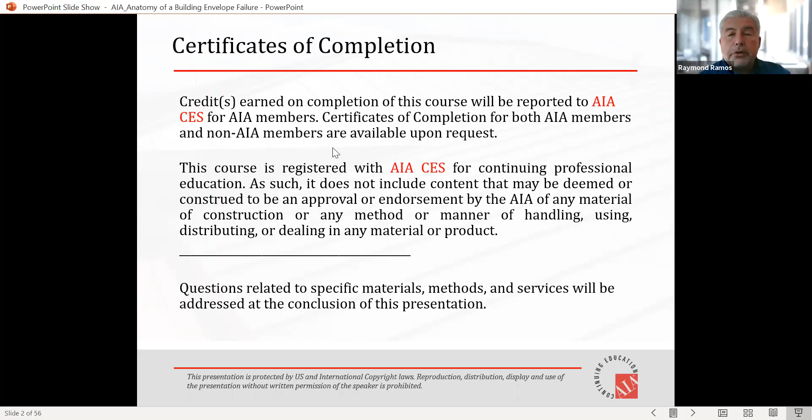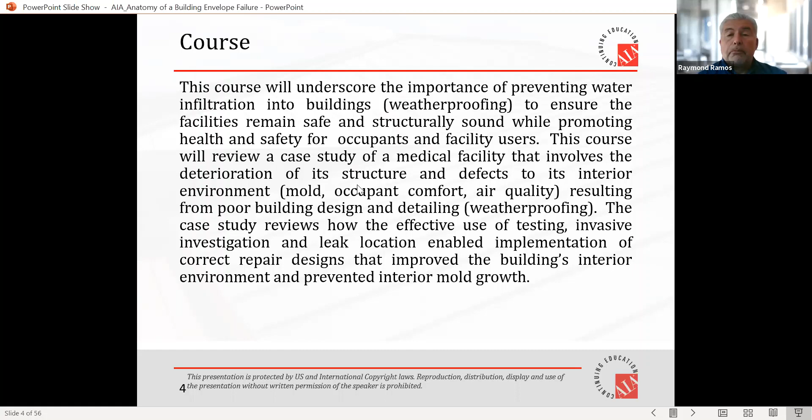What we will cover in this presentation is issues that you can encounter with a building envelope failure. We call it building envelope now because primarily, years ago when I got in the business in '84, most of our attention was on the roofs. We would look at the walls and structures, but for the most part everybody was paying attention to where the water is coming in through the roof system. With changes in how we build facades, more and more we're finding the roof isn't always the problem - maybe it's something else with the building envelope components causing water infiltration. And with the emphasis on air barriers, it has definitely had an impact on condensation issues that can occur within a facility over long periods of time.

So we'll take a look at what can entail in a building envelope failure. We're using in this presentation a project that we actually did over in Eastern North Carolina a number of years ago - the methodologies used to determine what the problems were, and the solutions that were developed to solve these particular problems.

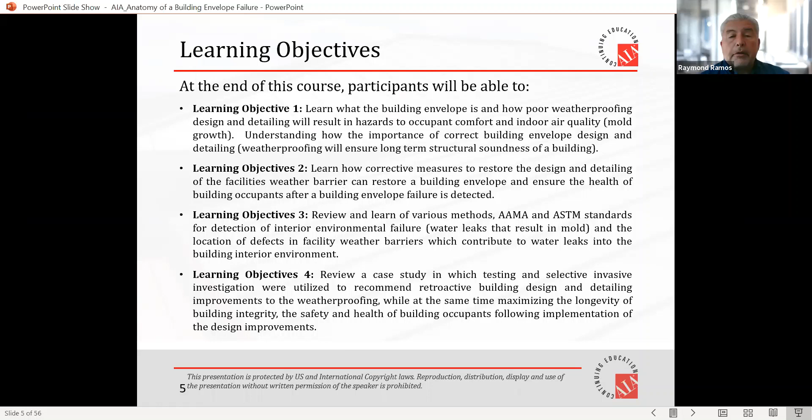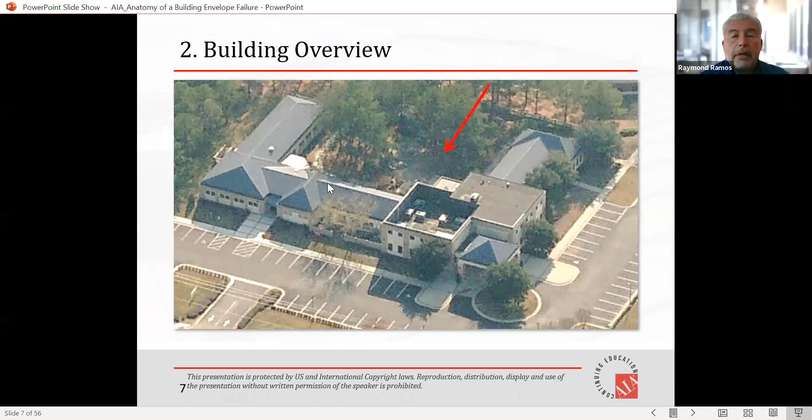So what we're going to look at is a neurology clinic in Greenville, North Carolina. When you look down on it, it looks like a pretty standard building. You can see we have a flat roof area. We'll zoom in closer and you'll see that we have metal roofs on most of the building, and when we look closer, we have a brick veneer facade.

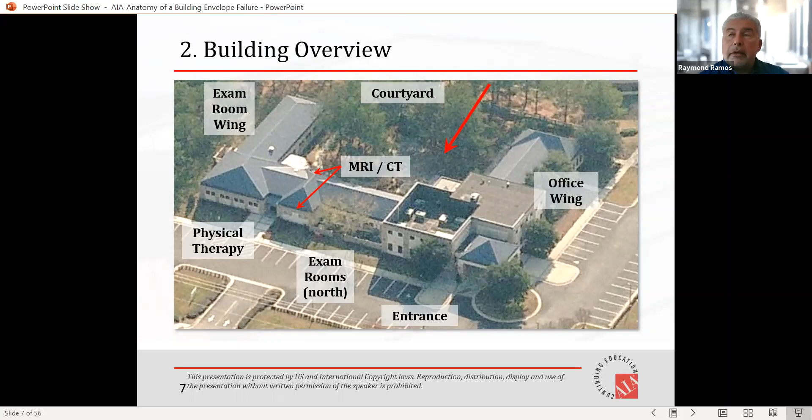This gives you a layout of how the building is presently being used, where we have the entrance and office wings, exam rooms, an MRI area near the center of one of the wings, and then physical therapy - not much different from any time any of us have been in to see a doctor or a specialist.

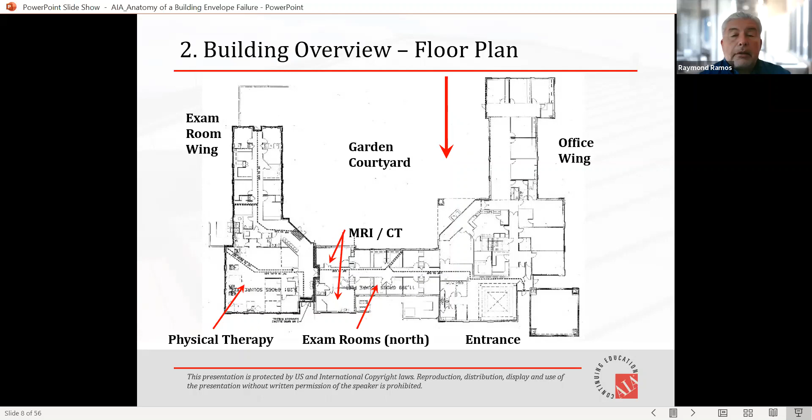Looking down on the floor plan, you see it's really just broken down mostly into an office configuration. Even the MRI and CT areas are office layouts, except now they have specialty equipment within those. Physical therapy will have basically weights and equipment to deal with these particular patients.

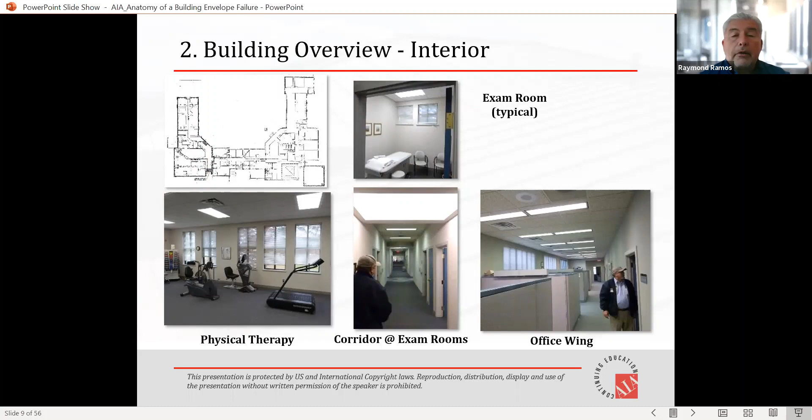When you look inside, you can see again it's a typical medical office facility - sheetrock walls, lighting in the ceilings, drop ceilings, pretty standard carpeting in the flooring areas, and linoleum for the most part. Now, the owner is basically complaining about water coming into the building - that's really what they're dealing with. As a result, they've got peeling paper and mold as some of the issues.

They're really not certain what is the cause of it. They suspect the roof as being the problem with this particular infiltration issue. So we're going to go in and look at this and see what the problem is. Is it the roof? Is it something else? Is it windows? Because a lot of the leaks are around windows.

If you need to do testing or more invasive examinations, this could entail water testing, infrared work, nuclear work, whichever the case may be on the roof. It may require removal of some sheetrock inside in order to look at some of the leaks that are occurring, particularly as you go into water testing. So those are some of the things you get into with this.

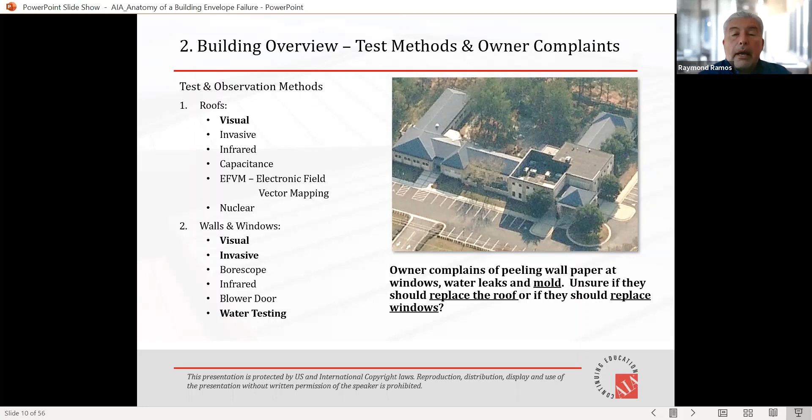So, like I said, excuse me, I'm at the house and I didn't bother to deal with that particular phone.

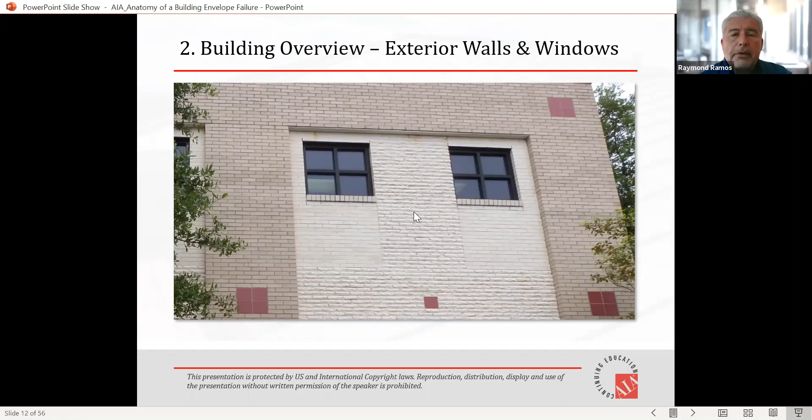As you can see from ground level, we're dealing with a brick veneer on the vertical surfaces. We have some inset brick veneer also on the two-story and a few other locations. Typically we're dealing with a lintel system to hold up the brick above these inset areas, and then the window systems in there.

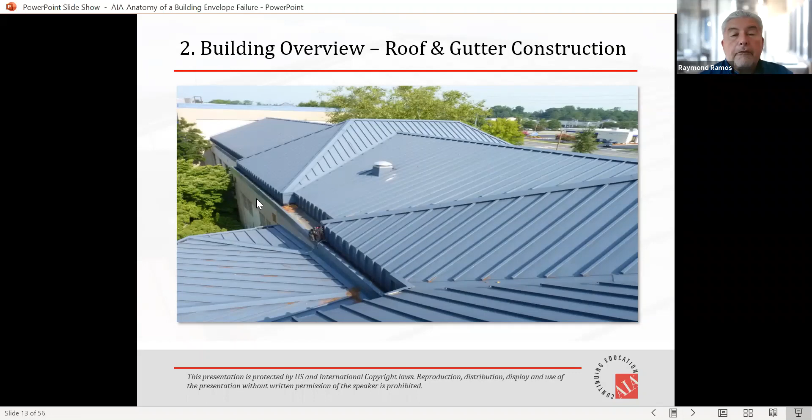The roof system is standing seam, typical metal systems. What's a little unique about this is we have a gutter system. Not trying to pick on architects, but architects tend to not like gutters. We have to control the flow of water, but they also wanted it to blend in with the facility. So these are actually gutter systems that sit on top of the exterior walls, which is how they blended the gutter system in so it doesn't really jut out from the facade.

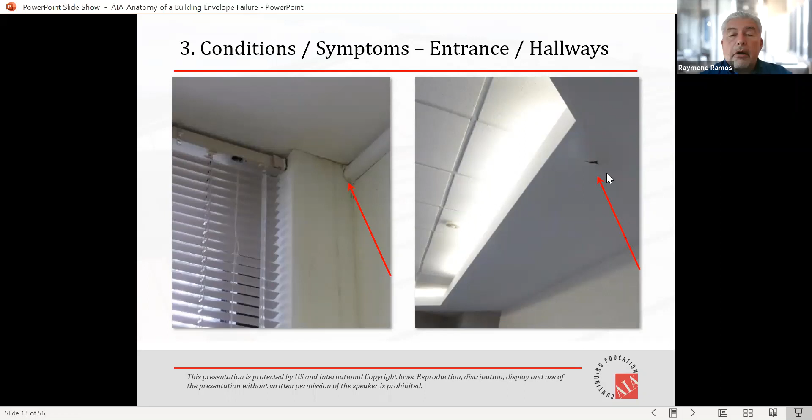Leaks that are occurring, the vast majority are at the perimeters, at windows. There are some in the hallways offset from the windows, but that's not typical. We've got the physical therapy area, and they've got window leaks also throughout this area.

What's really interesting about these window leaks and the problems they've been having, because they've been having them for quite some time, is the development of mold.

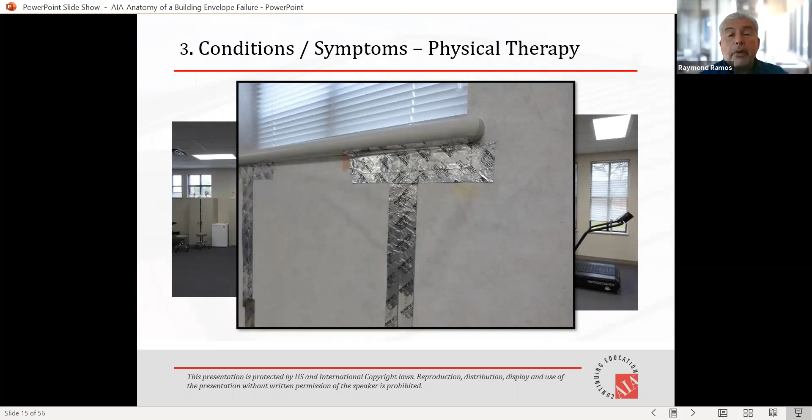Essentially what you're looking at here is aluminum tape. The reason it's here is because most patients and medical folks really don't like people to see mold. They get upset about it, and we need to do something. So the interim solution for the clinic was essentially to use the tape in order to remediate the mold, which I thought was a pretty interesting way of mold remediation.

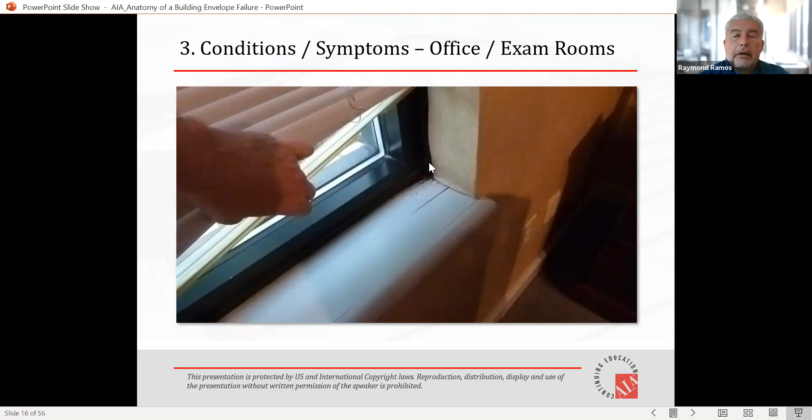We can see at the windows where we have some deterioration of the sills, indicating that water is coming in. We have wallpaper that's coming loose in these areas. So these are typical things you would see that might indicate we've got window leaks.

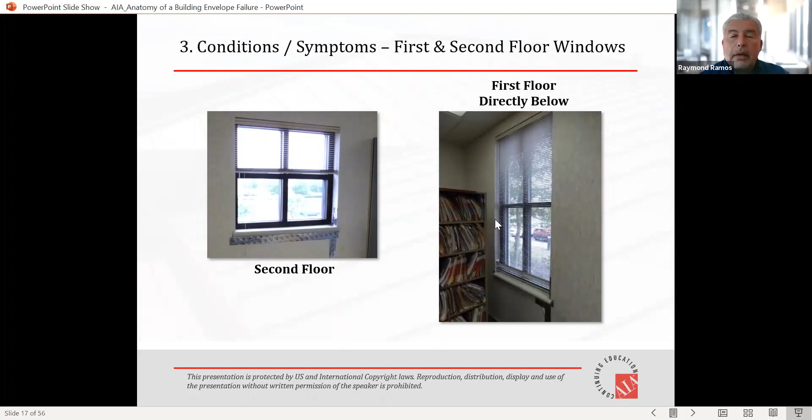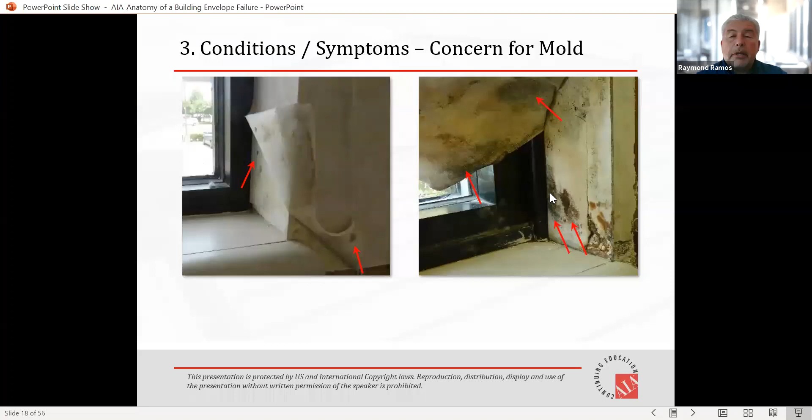Again, we have tape to control mold in certain locations, so we may have a window problem here. We can see, again, deterioration of the wallpaper to the point that we've got mold developing on the sheetrock at the windows. So could it be the windows? It could be. Could it be an air barrier issue? That's a possibility too. It doesn't always mean that we do, but it gives us an indicator of what the next steps are going to be.

One of the things you have to be careful about is whether or not to use wallpaper at exterior walls, particularly in the South. Usually the problem is because we have a lot of leaking that occurs through penetrations such as windows. As a result of that leakage coming in and going out, we also have the movement of vapor, and it will find a place to condense. It will hit a dew point as it moves through that system, through that opening. Depending on the materials that are there, this will determine whether or not you will have problems with wallpaper and mold and mildew developing on these particular components.

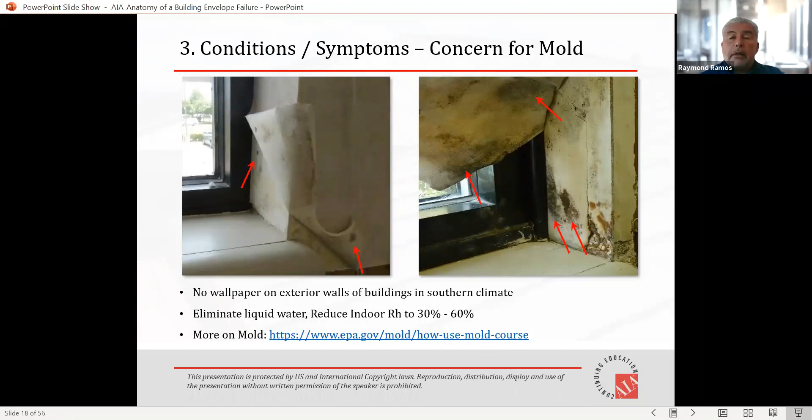So it's very important that the air barrier system is well developed, just to make sure you don't have that particular problem. Can you put wallpaper in the South on exterior walls? Yes, you can. But again, make sure you're dealing with the movement of air and moisture, particularly at penetrations.

The condition of the roof appeared to be pretty good overall, with some minor problems. For instance, you bring a ridge flashing into a valley, which is something you really don't want to do, and it's difficult to flash already. So usually the solution for a roofing contractor is to caulk it up enough to solve the problem, at least until the warranty expires.

So they're already having failure of the caulk. Is it a leak? It all depends on what's underneath the metal system. If they've got a good secondary membrane and underlayment, very likely that water is shedding to the eaves and nobody would be the wiser to a problem.

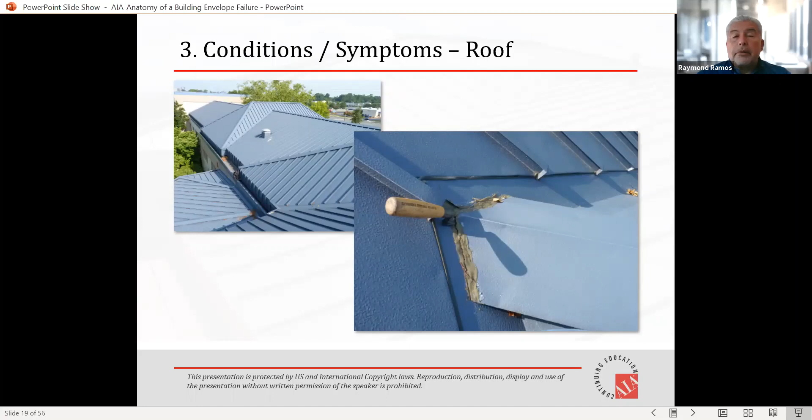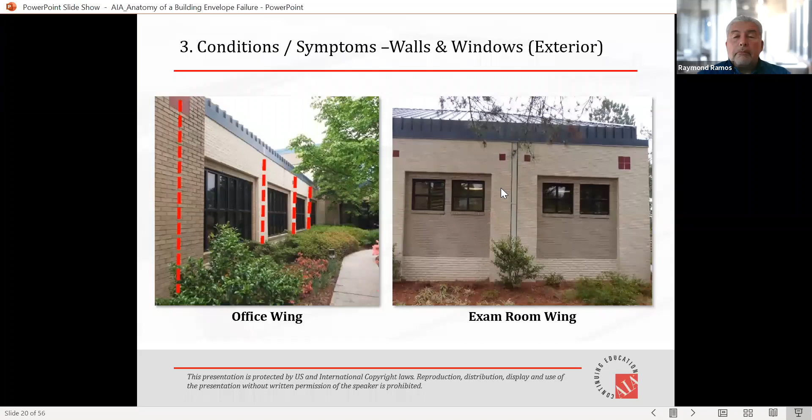So we talked about the interior gutters that have been installed. Again, architects like to hide things that don't look good, and downspouts don't look good either. In this case, on the left side, they're actually behind the veneer at the columns between the windows and at the brick. In some cases, you also see that they've built them inset into the wall. So technically they're not in there, but they're there to look a little prettier, you might say. They don't stick out when you do it that way.

Other issues you can encounter, particularly with brick veneers, is they have a tendency of cracking. It could be a settlement issue. That's usually what this particular crack at the window indicates. We've got a little bit of settlement, but it's not terribly bad.

You're going to get separation on a normal basis between the interface of the mortar and the brick. It depends on the condition of the brick at the time of installation and whether the mortar was either too wet, too dry, or just about right. Depending on that, it will determine whether or not the cement paste actually migrates into the brick. If you get good migration, you get much, much less cracking.

If the brick is too dry, the water and the cement paste won't migrate appropriately, and you'll get cracking. The same is true if the brick is too wet—you won't get that migration of the cement to the interface of the brick.

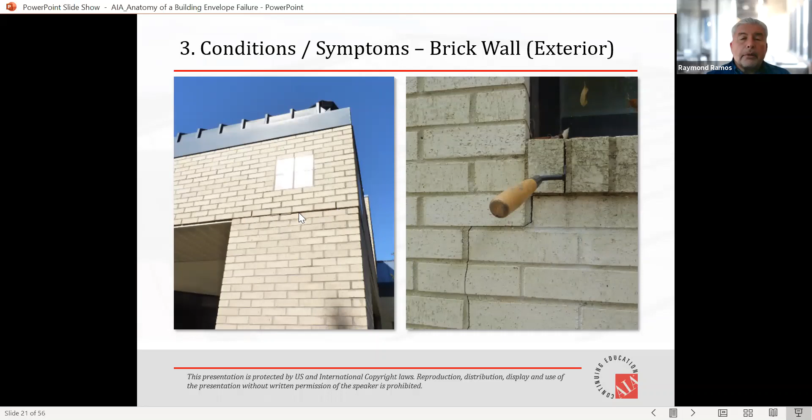So what we're seeing here is a little bit of settlement, some cracking, a cracked brick. We've got some deterioration here. Very likely we've got some steel here, and so we're seeing a failure of the mortar, particularly at the line with the lintel.

On these offsets, if you look at them quickly, they actually look pretty good. What they've done is taken sheet metal and covered up these very, very deteriorated steel lintels. So there's been a lot of water getting in through the system into the brick, and this is one way they've tried to deal with that particular problem, although it didn't solve anything other than to make it look prettier.

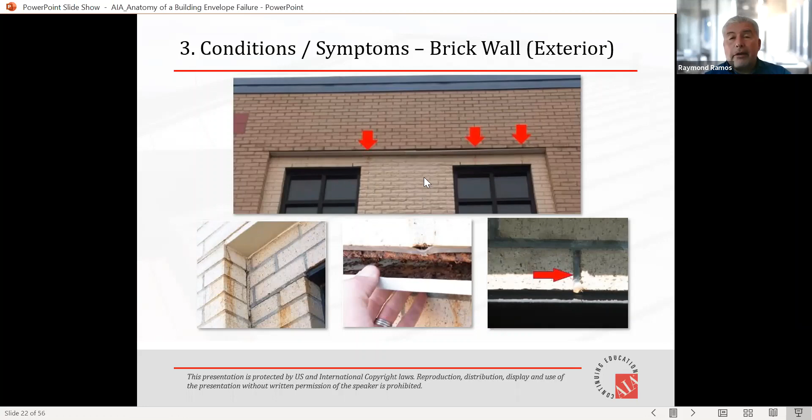So we've gone into a little bit of the visual examination. In this particular case, we moved into water testing, wanting to verify why the water is coming in and how it's coming in. A visual won't always tell you—as I indicated with the windows, it could be water coming in as a result of improper flashings or no flashing, or it could be a condensation issue. So in this case, we moved to water testing of certain components to make a determination of what the problem is. This type of testing, in order to verify it, may require making some openings, which was done on this particular job.

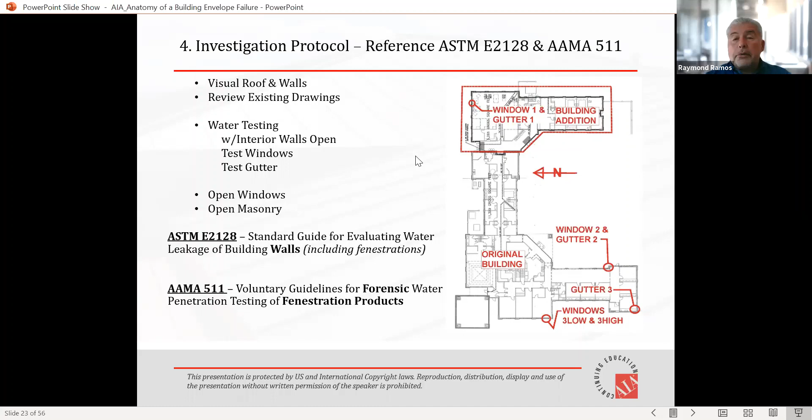Now, in the water testing, there are test procedures that you should be following. However, these test procedures are usually used particularly for the 503 standard, for newly installed storefronts. There is a methodology, and it involves a time frame for running the water on to make sure that the flashing systems are working appropriately.

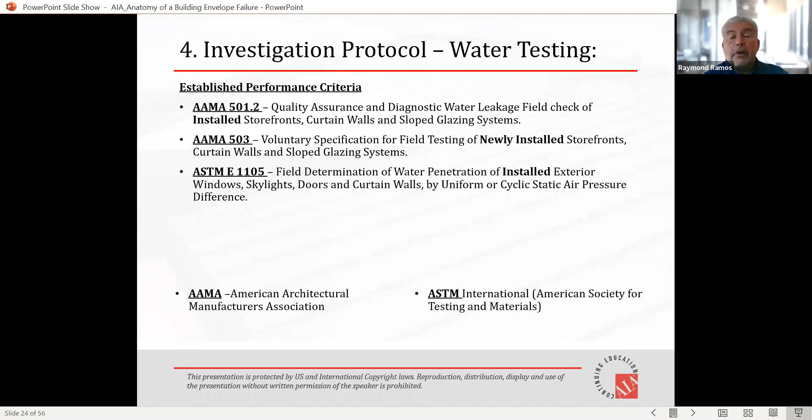When you get into the investigative methodology, you don't have to follow a time frame, because what you're looking to do in an investigation is find where the water is coming in at the locations where it's being seen from the inside. So we don't really care about testing it for 15 minutes, because in some cases that might mean we're flooding the building. We want to be able to duplicate what happened, but do it appropriately so we're not affecting interior operations. So these procedures are used as the standard for how we test, but it gets modified based on the circumstances under which we're testing.

There are several methodologies involved. The easiest one is a calibrated nozzle.

You are typically running a certain pressure through that nozzle that you can control, and you're also setting that nozzle at a certain distance, usually about 12 inches. So you have these nozzle systems that actually have a rod attached to them that'll make sure you're maintaining the distance. Now, you can test with or without pressure on that component.

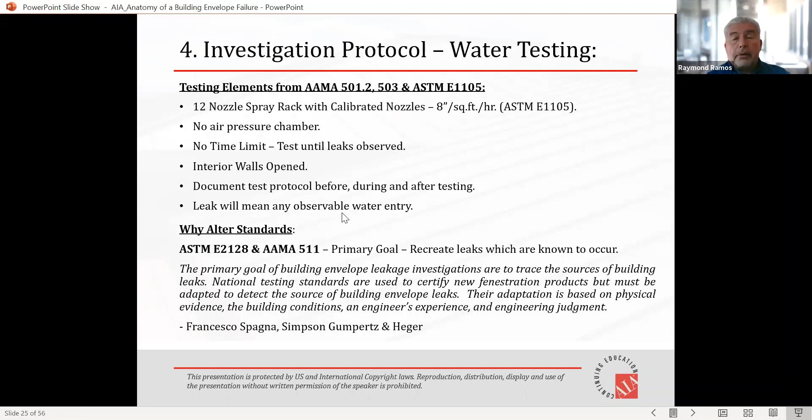A lot of times in investigation, we're running a static test. We're not going to put negative pressure on the interior space to try and duplicate hurricane force or high wind events. So it depends, and it's also dependent upon cost. Do you really need to do that? A lot of times we can get our answers either with the nozzle test, or with a spray rack, where we're putting a uniform amount of water on the entire component to test it. So there's different ways you can approach these systems.

On the protocols used on this particular building, it was mainly using a spray rack set up against the windows, and then making selected openings in the interior spaces to see if water is coming in. Because sometimes when you have sheetrock ceilings and walls, being able to see water coming in immediately may not happen. You may need to add a significant amount of water before it starts showing up through the sheetrock.

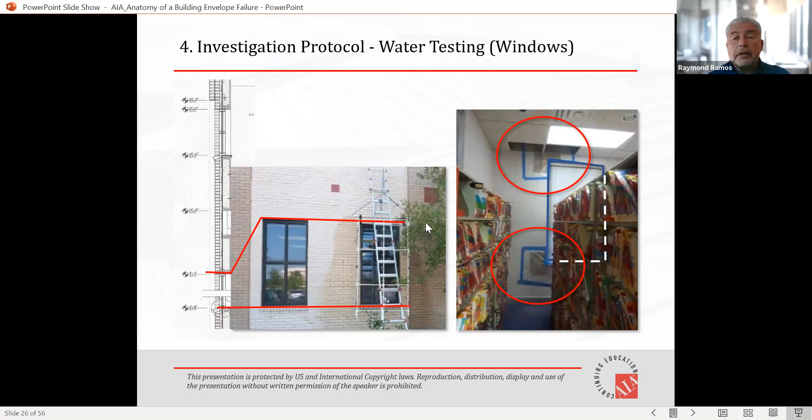With the sheetrock in place, we don't really know where the water is entering through that wall system or window system. So typically you're looking at making selected openings through it. And here you can see the rack is set up over a window system and then running it. Again, this is a pressurized system, and you may need pumps as you get higher up on a building in order to get the pressures you need to run this.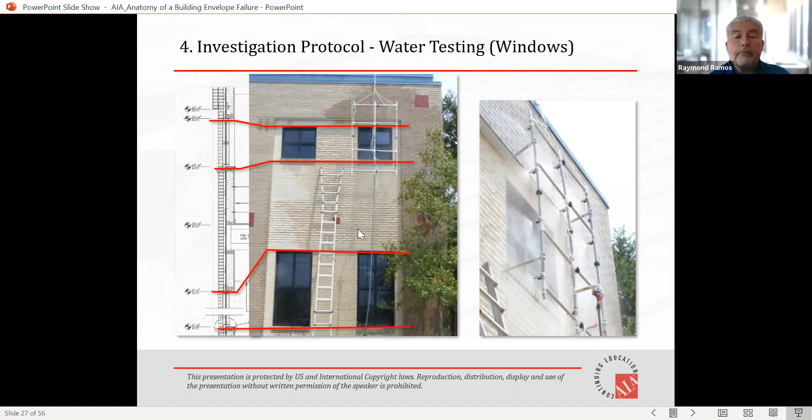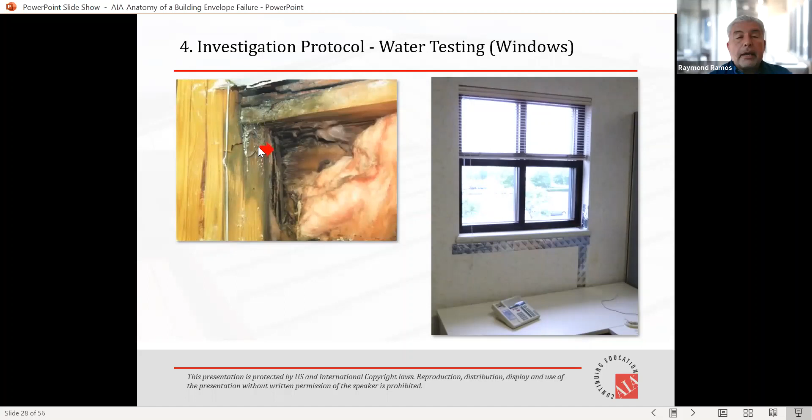In this case, we can see we've had deteriorated wood as a result of water infiltration, and the testing revealed that we were able to duplicate where that water is coming in and causing this particular damage in this room. Again, you can see we have stained plywood on both surfaces, the horizontal and the vertical surfaces.

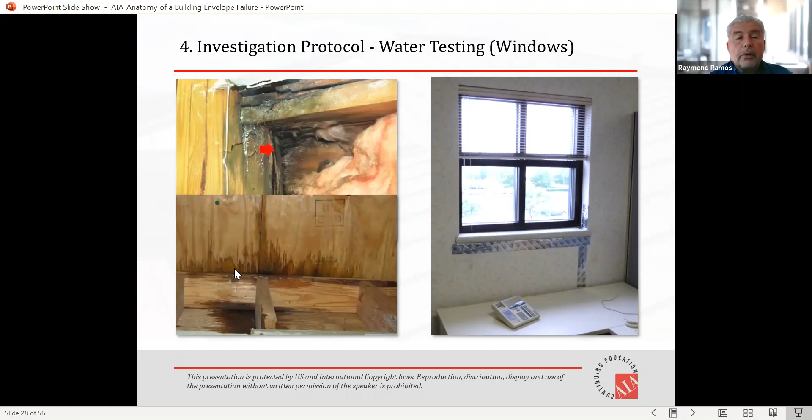And then the windows - this is where we're looking for, is it a window problem or do we think we have a flashing problem? So typically on something like this, we would do a combination. We may want to get water only on those windows, so we would adjust our nozzles appropriately. Or if we want to get the lintel, we may use this system, or we may use just a handheld nozzle system to test the through-wall flashings. A lot of it depends on whether or not we're going to be able to get enough water on a particular component to replicate the leaks that are occurring in the building.

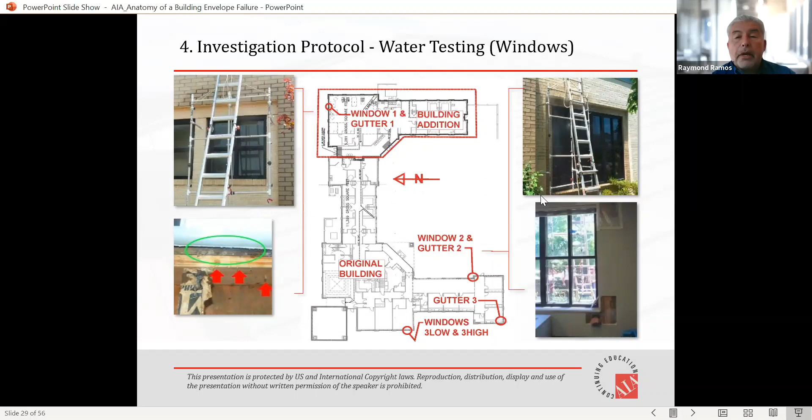In this case, the spray rack system worked quite well in answering the vast majority of our problems. Since we have a gutter that sits on top of the wall, the gutter is always suspect as to whether or not it's contributing to a particular problem.

So in this particular instance, the downspouts were plugged and water was added. And you can see here that we have water that's actually running down the walls, which is a good thing, except you can see above us, the gutter's not full. So why is that happening? That then becomes the next question, and we'll get into that a little bit later and whether or not this is contributing.

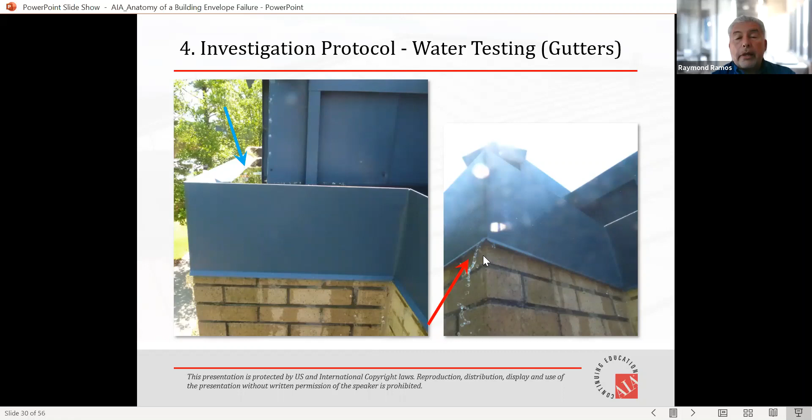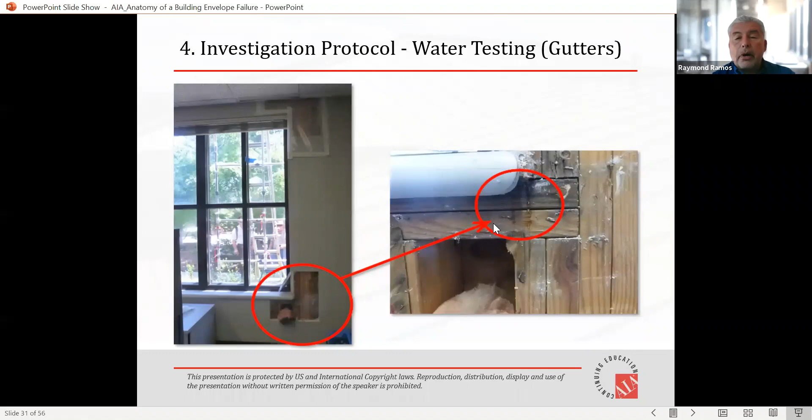And what they found is that as they filled this up and it started leaking, they were replicating the leaks at certain locations within the building. As we can see here, as a result of filling the gutters, this is what we're getting on the inside of the facility at those test locations.

The problem is kind of twofold. If you look at the front and the back, you can see the gutter essentially is at the same level. In fact, very likely the water gets behind the gutter before it starts running over the front. The second problem is there's no secondary flashings around here, and usually this is a pretty typical problem that we see when they're not paying attention to either the design or the construction of interior gutters.

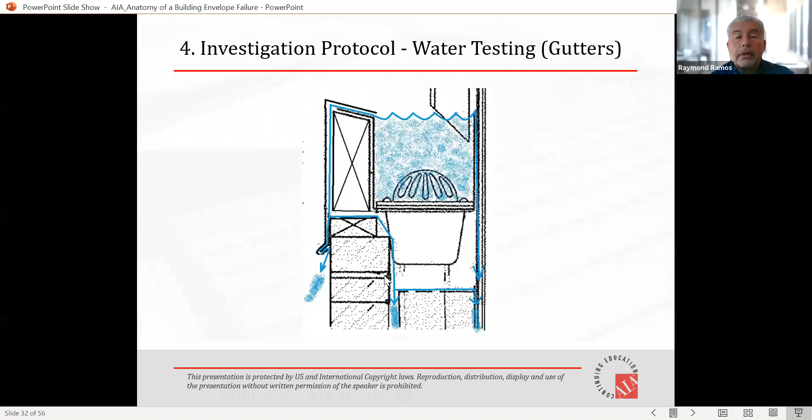They failed to put this flashing in, so in the event we have a leak, the water has a way to get into the interior spaces. When this gutter overflows, which isn't uncommon during heavy rain events, it's already past most flashings at this point. If it's getting back here, whereas it should be getting up here, which it's not, this is why a lot of the water was coming in in those situations.

Construction of the windows is also critical. In this particular case, we actually have negative slope on the windowsill, so that water, particularly during a wind-driven rain event, is able to penetrate failed caulking, which isn't uncommon. That's just a maintenance issue, but it usually gets ignored. It allows water to stand there, and if there's any defect in the flashing or caulk system, it can then come in.

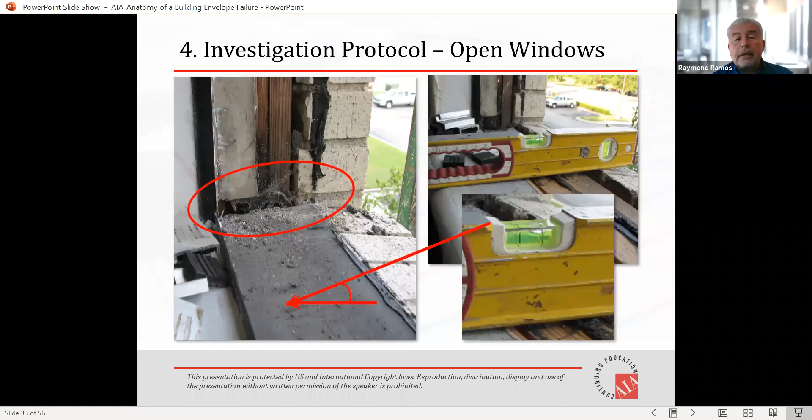And this is one of the other problems that was encountered on this particular facility. You can see we have a negative slope on this.

Also, we found we were dealing with improper installation of the windows. There is a process to it—it's not just a matter of putting it all together and dropping it in. Usually with guys, the problem you encounter is that if all else fails, they'll read the instructions. So usually that doesn't happen in the field. They have the attitude, well, I've been installing windows for 20 years, I think I know what I'm doing.

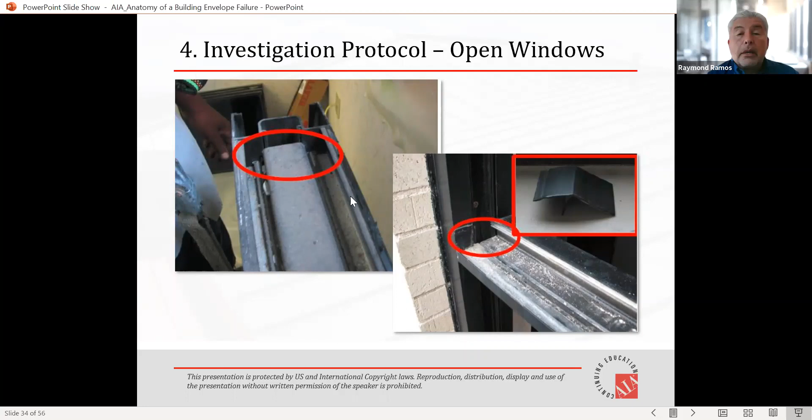A lot of times what we find with window installations is a failure to install the system in accordance with the manufacturer's instructions. They don't place caulk in the right places, or don't place it at all. They puncture the framing at inappropriate locations, which allows water to get in where we don't want it to go. So this can be a problem, and in this particular facility we were running into that.

Also a lack of weeps. It's fine to put this in, but everybody thinks water doesn't get through the masonry—well, it does. It's got to have a weep system to let that water out of the cavity areas. Also, it's important during construction to keep the cavities clear of mortar. Failure to do so allows any water that does get in to bridge across to the interior wall, and that can be a source of water getting into the building—it's got its own little bridge to get there.

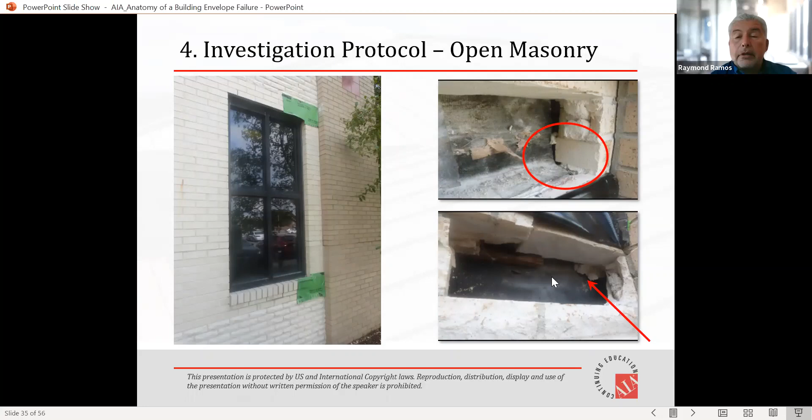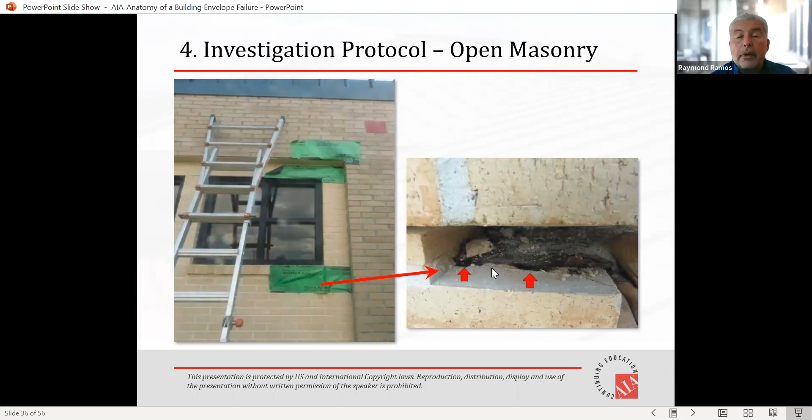So these were some of the problems encountered with this. This one doesn't come nearly far enough out. Typically you want to seal this down to the surface, so that if water does wick to the end—or if this isn't all the way to the edge—it can't go back underneath it. This one, it can do that very easily. So that's kind of what we're dealing with.

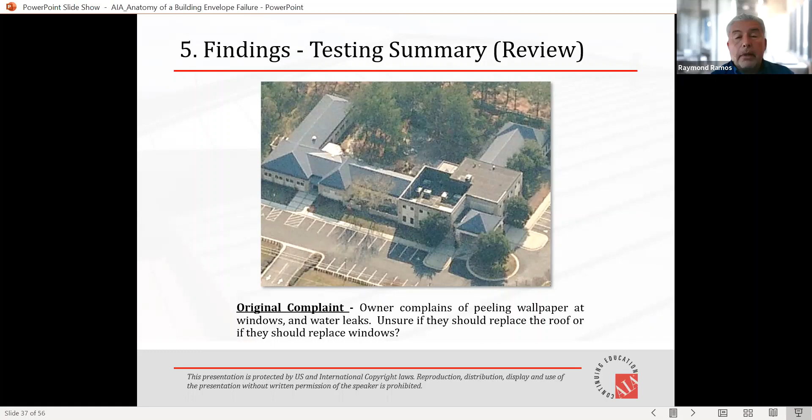The original complaint was peeling wallpaper and water leaks. So is it the roof? Is it the walls? Is it the windows? What is it? What we essentially found is a number of problems all contributing to this. The windows were not installed correctly. The sill pans were defective. They didn't have end dams in them. There was improper slope of the sills, so water flowed towards the building instead of away from it.

The masonry through-wall flashings—we usually find this is a typical problem in brick veneer, and it's become worse since the last recession because we've lost a lot of that institutional knowledge. So that's typically a big problem. As a result, if you don't control that water, you've got uncontrolled flow that can rust out your lintels and leak into the facility, whichever the case may be. Then at grade, we had weep holes that were covered up and clogged with the mulch that had been installed.

Gutters, we talked about those, and they were improperly fabricated, installed, may have been improperly designed for all we know, but it's a little bit late in the game to hang anybody over any of this anyway.

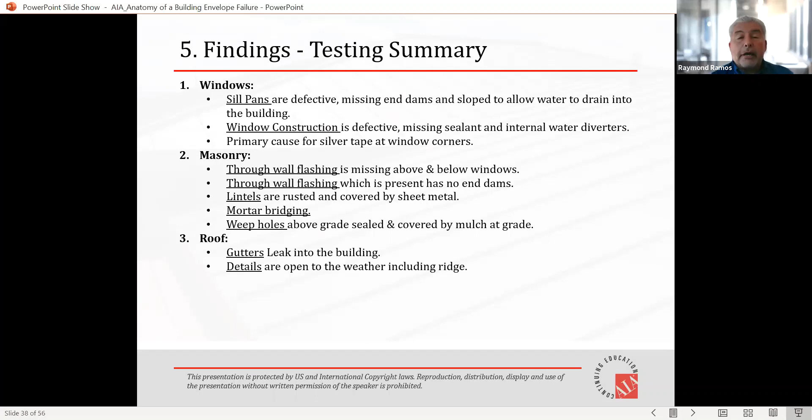So how do you fix some of this? Well, you have relatively inexpensive, or you have very expensive solutions to dealing with it. Can you repair an interior gutter? Yes, you can. It may require that you pull out the flashing system, the sheet metal system, and redo it so that you can then get in a secondary system. This is the least invasive of any solution, try and solve it without full destruction of the system.

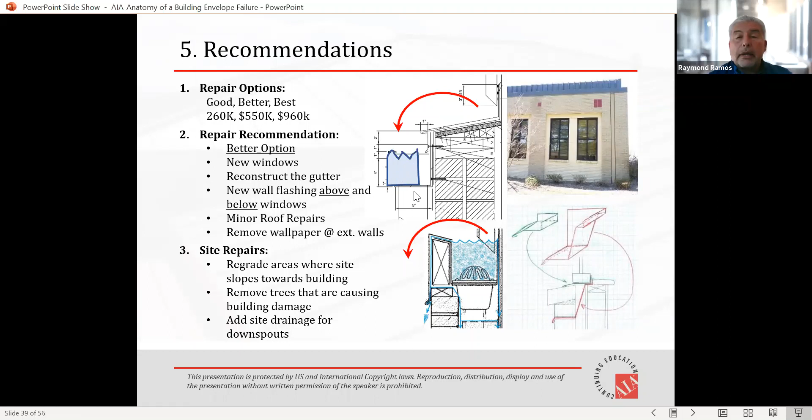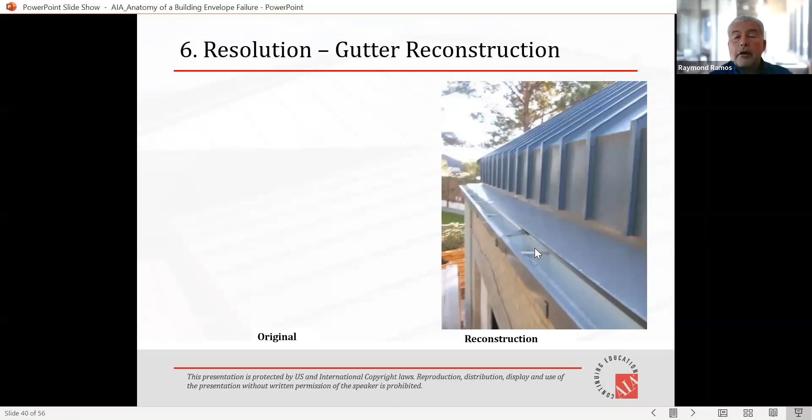The one that always works best is to get the gutter outside of the exterior wall. In this particular case, you can see we've got a little detail where we closed up the interior gutter completely, put new sheet metal flashing over it, and the gutter and downspout system is now outside of the exterior wall. You can see what that looks like. This is the finished product when they got done with this. And this solves your gutter problems. Doesn't look nearly as pretty, but from a technical engineering standpoint, it works very well.

Again, looking at the detail of a bigger blow up of that, they took the wood blocking, closed everything off where the gutter had been, and then moved it to the exterior of the wall. In some cases where the downspouts were inset into the existing wall, they kept that look. Where the downspouts were actually built into the wall, they did not. We put the downspouts on the exterior face of the wall.

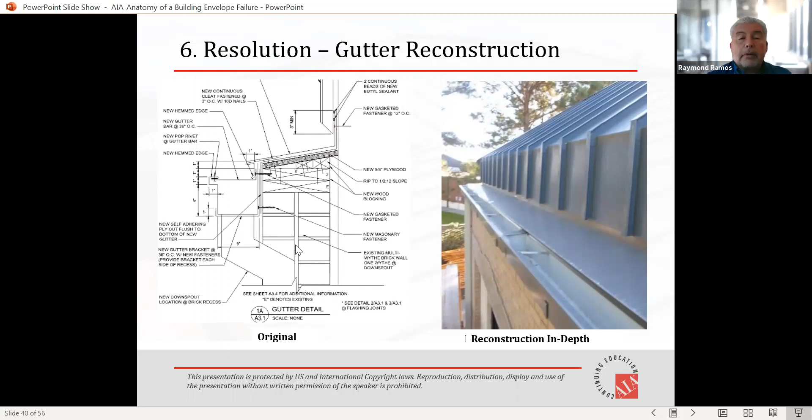On the flashing issues, this is kind of the bad news, where you're going to spend a lot of time and money trying to fix these particular problems. There's no real easy way to do them. Well, I take that back. You could put a coating system on. Clear coat, you could do that, but that system will fail usually within 3 to 5 years, and you'll be right back where you started. The whole intent of the coating is to keep the water from getting in there in the first place, but that clear coating will typically start cracking very quickly over the joints.

You can do a more durable coating, such as a urethane. That's going to change the aesthetics of the building completely, so it's going to kind of look like a brick wall that's been painted. That will last longer. Where you have to be careful about doing something like that is depending on where you are in the country. The farther north you are, the more of a problem you can have with vapor migration from the interior to the exterior. It then condenses at the interface of the brick and the coating, freezes, and you start getting spalling of the brick face in certain circumstances. So it really depends on interior operations, what kind of humidity is run inside, whether or not that will be an issue. The farther south you are, the less that will be of an issue. And it is a cheap way, but you get to do it over again, usually within 8 to 10 years.

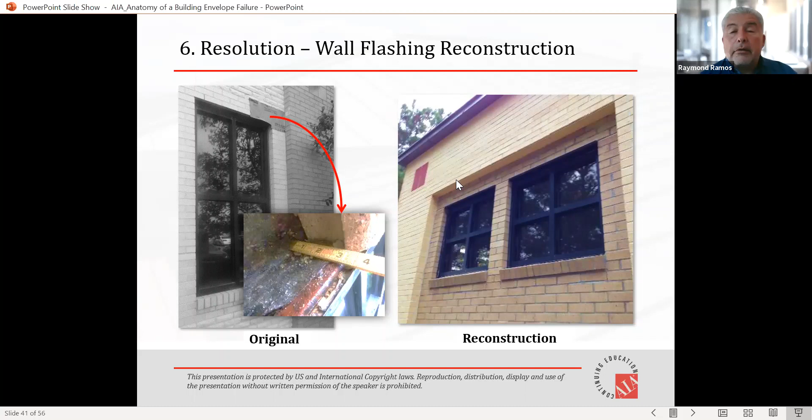The third option is where you go in and start removing brick, and in this case, lintels and windows. We had no choice but to remove the windows because they were installed incorrectly in the first place, so they were going to have to be removed. This entails removal of brick materials above, replacement of the lintels, putting in new through-wall flashing systems, and then installing new brick. The problem you have a lot of times is that technically it'll work very well if you get it done correctly by somebody who actually knows what they're doing.

The problem you can run into is whether or not you can get the matching brick. A lot of times now we can, because the firing of the brick is fairly standardized, since they're using gas in order to control the heat within the kilns. So we've had a lot of success with brick replacement, unless it's a brick that's just no longer being fabricated at all, then it becomes another problem.

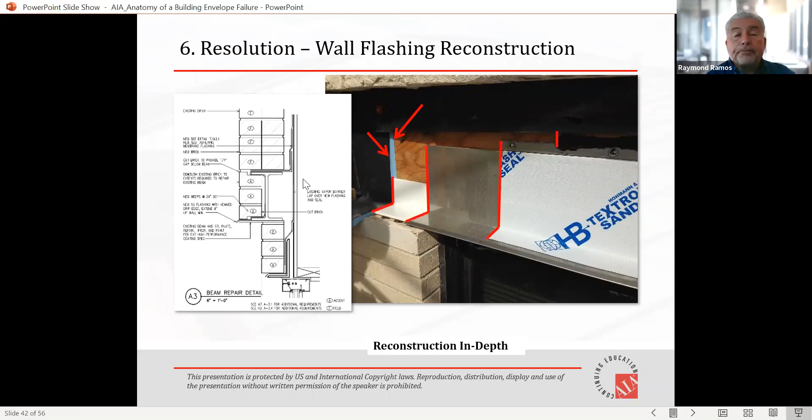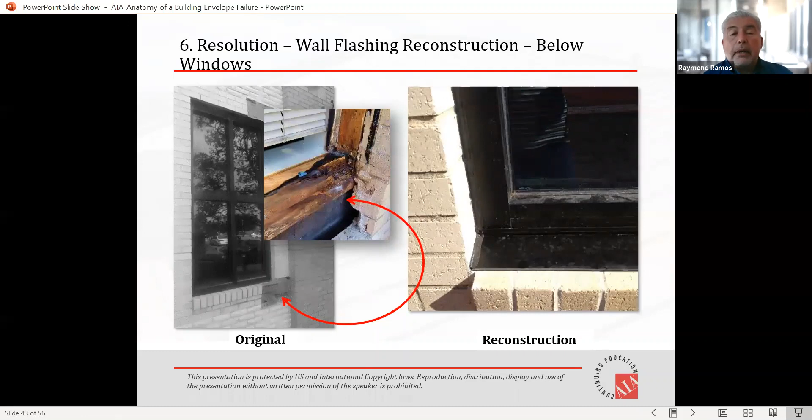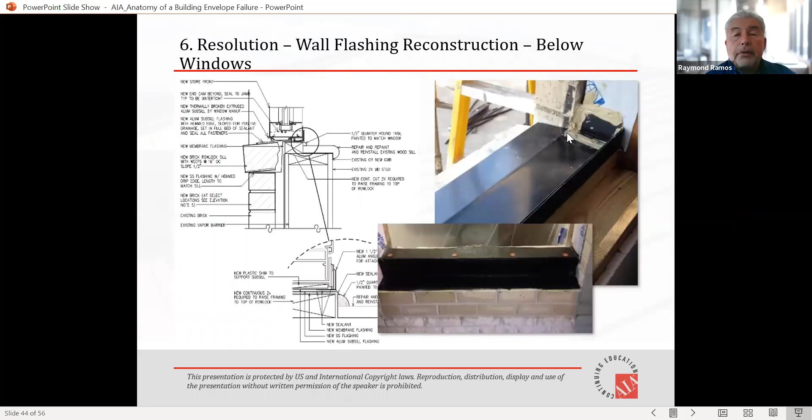You can see some of the detail work that was done on this particular one. Below the windows, in some cases, this required a complete reconstruction of the sills: one, to get the positive slope; two, to get rid of the rotted wood. They reset the sills and put in new flashings in order to make sure that water does not get inside the building at these locations. So these are some of the details that were developed in order to deal with this. You can see during construction what this looks like, in order to make sure that we don't have water coming in.

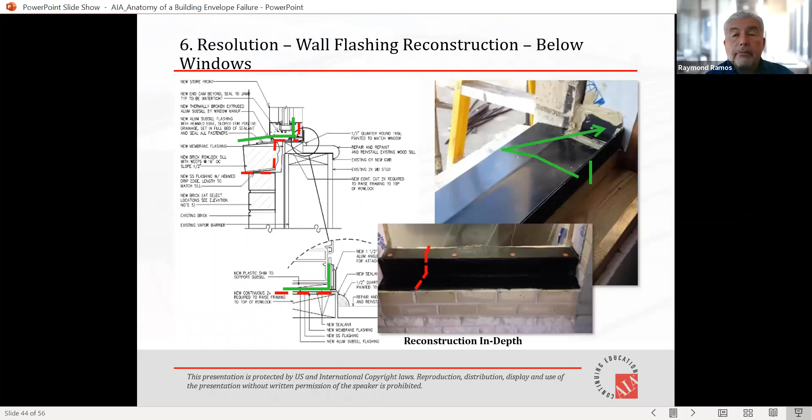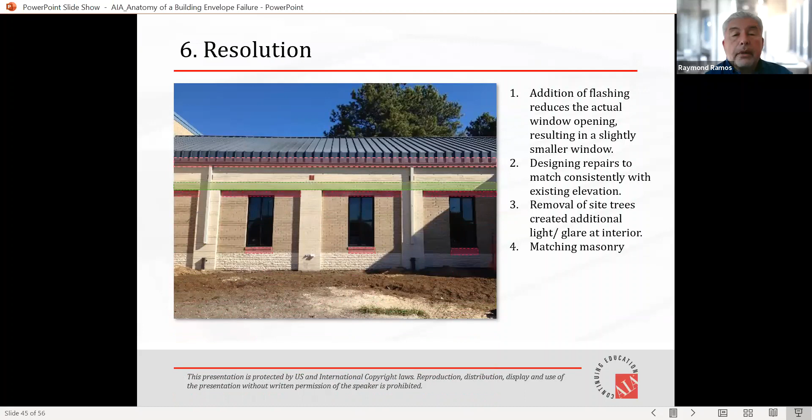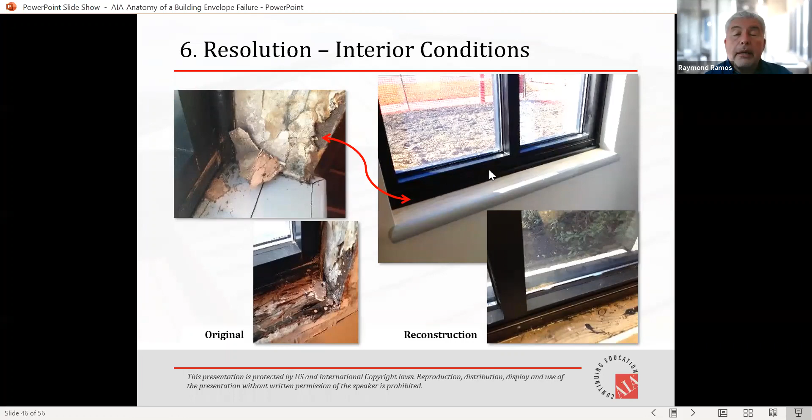So the interior conditions, okay. Once you get done with it, here's what we had on the original problems. Reconstruction essentially is to tear all of this out, rebuild it once the windows and the window flashings have been reconfigured, redesigned, and reinstalled. So this is what you will get. And as far as we know, we haven't had any problems with any of these issues that were detected within this particular clinic.

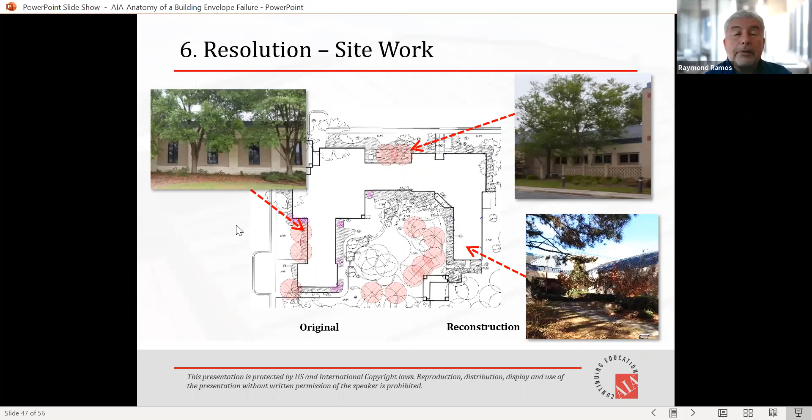Part of what also had to be done was to deal with trees. I know we love trees, but trees are not the friends of roofs and facade systems in all instances. So some trimming was required in order to deal with some of these issues. A little bit of modification had to be done to the underground drainage system because we're now putting the downspouts on the exterior wall. So a little bit of digging in order to redo the drainage underground.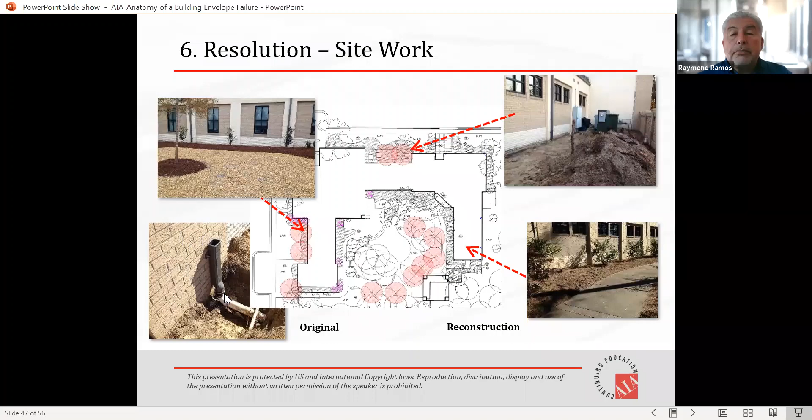And that concludes the presentation. I hope what has been presented will give you a pretty good idea of what it takes sometimes in order to evaluate a particular problem, because there's a lot of times we get involved with projects where you have a lot of finger pointing. Hey, it's a roof, it's the HVAC units, it's the walls, it's the windows, it's various different things. And it requires a methodology in order to try and figure it out.

And usually with that methodology, there's a cost associated with it. But if you do it right, the cost can be controlled. And it's going to save you a lot of headache in the long term, particularly the cost of having to replace materials again and again and not getting the solution right. So the methodology is very important.